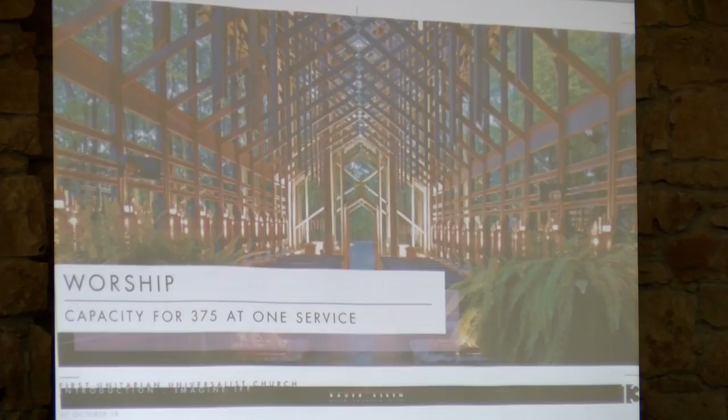And imagine if we had a worship space that was equally enthralling an atmosphere as what we're sitting in today. Imagine if we had a worship space that could have the capacity for 375 people at one service. Imagine if we had a worship space that met all the current energy and lighting technology qualities about that space. Imagine if we had a worship space that had the proper accessory spaces, narthex and that sort of thing. Imagine if we had a worship space that was fully accessible.

And then imagine if we had a campus that was a park-like setting. You have all the ingredients of that here on this property. Imagine if we had a campus where we had proper auto and pedestrian ways, so that there's not a lot of crisscross, and so that you don't open your car door and bang into the next car because of the slope of the parking lot.

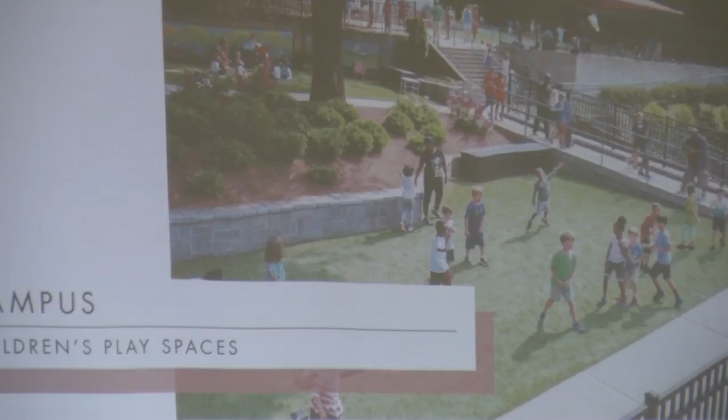Imagine if we had a campus with proper children's play spaces. And then imagine if we had a campus that had workforce housing incorporated into it, not only as a part of your ministry, expanding your ministry, but also as an income producer.

So what we've done is when we imagine all of those things, we try to evaluate what you have existing and then what the potential is in the future.

We work with a lot of churches, and finding the ideal site is usually the big stumbling block. So you all already have that, we believe.

And then you have 3 existing buildings on the property. The property is approximately 3.3 acres, and it's zoned R40 and R20, and that doesn't really affect the church because there aren't zones for churches, right? So churches are considered kind of an accessory use in a community. So really churches can be placed anywhere. They're kind of an exception to the zone.

So the next thing we do is we look at what are your program needs? What do you have today, and what do you need in the future? So I'm going to enlarge this a little bit if I can.

What we've done is we've gone through and analyzed what your existing spaces are within the church, and we've divided it into four categories: gathering (which is social), worship, administration, and education. Those are the four key categories.

So as we look at gathering, sorry, I'm juggling the microphone and the iPad at the same time. So if we look at gathering, what we've included as part of the gathering is the social hall. That's the biggest aspect of the gathering.

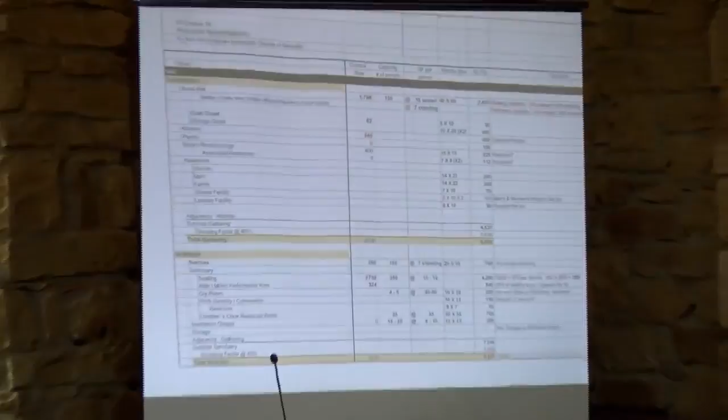But also, as you can see here, there are lots of different aspects of the social hall. You have the kitchen, pantry, and proper restrooms, that sort of thing. You have approximately 2,000 square feet that's devoted to that aspect of your ministry.

And what we're projecting is you need about 6,000 square feet for those things to properly function. That would allow a seating capacity of 133 people. Right now, you have an existing seating capacity of about 100.

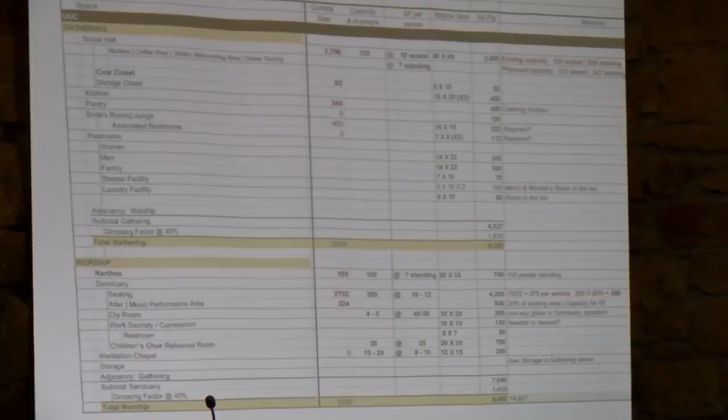So at 133 people seated, and standing in that same gathering space, the proposal would be about a 2,400 square foot space, so you could have about 342 people standing in a space like that. So it can serve various purposes, a properly sized gathering space or social hall for a 375 seat worship space.

That's the graph you see just below that. Your current worship space, the sanctuary, is about 2,700 square feet. We believe that based on needing to seat 375 people, you would need about 4,200 square feet for worship. So right now you have about 2,700 square feet, and we propose that you would need about 4,200 square feet for that.

Okay. This is going to help tremendously. Thank you. Thank you.

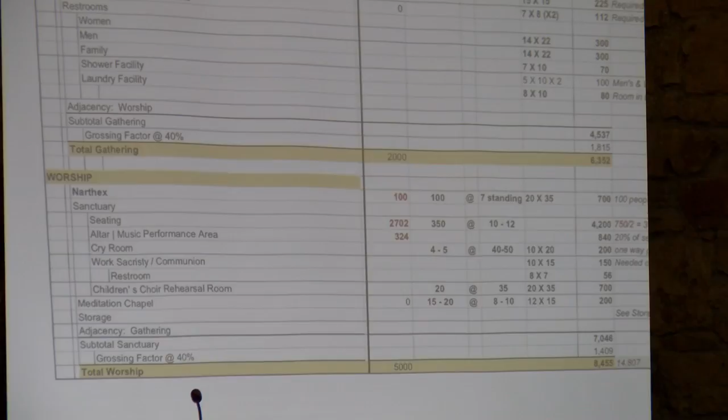As a part of the worship space in the program, we've included a narthex, so it would be separate. Right now, you kind of use your social space as your narthex. What we're proposing is, in a perfect world, you'd have a separate narthex for the worship space, which is an entry space before you go into a worship space.

In addition, you'd have the proper size altar for music and performance, a cry room, the work sacristy, perhaps a meditation chapel, and obviously storage. So all of those are elements of a worship space.

Right now, you have about 5,000 square feet. We're projecting that you need to seat 375 in the worship space, and we're projecting that you need about 8,400 square feet for that.

For administration space, you actually have a little bit more square footage today, but obviously the house used for administration isn't designed for that. So we have a lot of spaces that are probably larger than they need to be, and a lot that are kind of unusable for administrative space.

So what we propose is we've looked at all of the office needs for what you have currently and for your future, and we propose that you need about 3,300 square feet of space for administrative needs.

So imagine if you had all the things we talked about earlier: properly sized offices, conference rooms, work rooms—that's about the square footage you would need. All these things combine into what architects call a program of spaces.

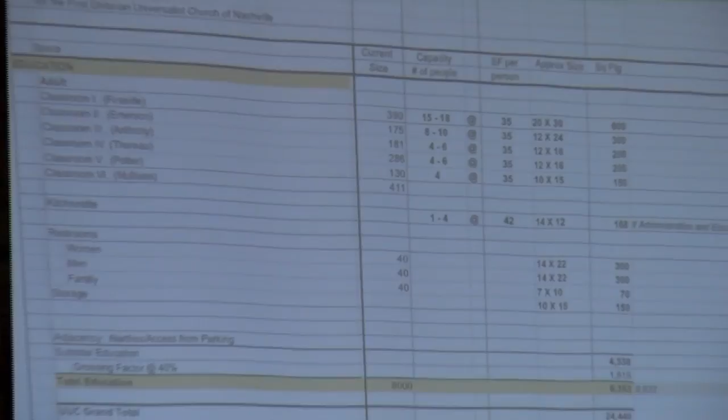So that's the four categories that we looked at, and then we looked at the possibility of workforce housing on the campus and what that might entail.

There's been some conversation prior to us, so we've taken that information and determined that if we had 1,200 square foot townhouse-type facilities, what would it be like to have 12 on our campus—12 townhouses considered workforce housing. That's about 14,400 square feet total.

So if we combine that information—your program needs—with the information we know about your site, and combine that with parking...

Parking is everything. I heard a presentation by the CEO of the Nashville airport, and he said everybody thinks we fly planes. It's not about planes, it's about parking.

And so they're in the parking business, not the plane business. Well, churches are very similar—you've got to have the parking in order to get people here, in order to have the proper number of spaces so that you can fill a worship space.

The R40 is on the Woodmont side, and the R20 is on the back side, on the top side. The setback, I've forgotten the exact numbers, but I believe they're about 30 or 45 feet on the 2 streets and the Woodmont side.

Part of it is because you don't really have a backyard. You have 3 front yards, 3 streets, and that's part of the reason why that setback goes that deep. So this diagram, just a quick diagram, shows you - you can't tell that at all, can't tell anything from that.

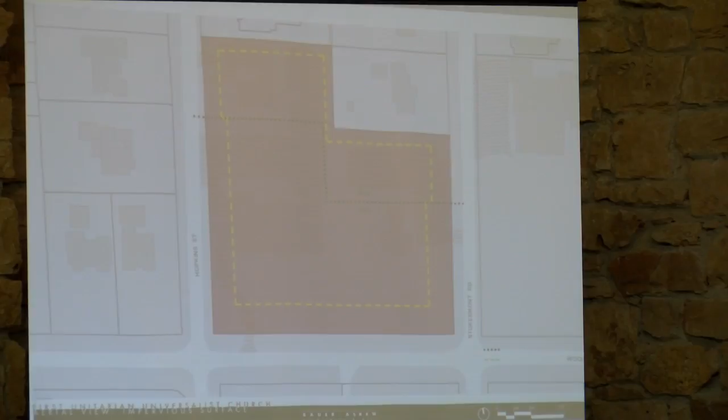But there's some delineation there that basically shows you where the impervious surfaces are - in other words, where water doesn't go through. So it's roofs and parking, and that's what this diagram was showing. And then this diagram was showing vegetation on the site, where the major tree areas of the site are.

This is what we work with most importantly, and that is what architects call a survey. So this is a topographic survey, and it's showing us a lot. You can't tell that from this information, but I'm going to walk you through a site analysis that we've done and tell you what this tells us.

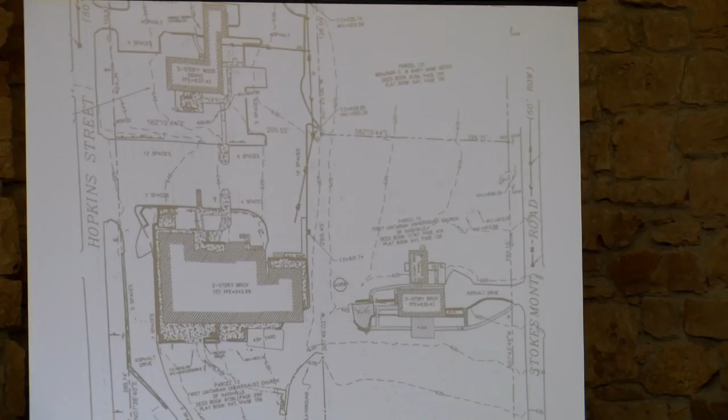Basically, it's siting where the worship space is - it's to the left, where the administrative offices are, and then at the top is the education classrooms. So this is like a site plan showing that, and it shows you your property boundaries and how we're bounded by Hopkins, Stokesmont, and Woodmont.

So what we do when we look at that is say, okay, what does all those lines mean? And what our analysis shows is that one of the more striking things about the property is we have a stream that runs through it, and the city has a right-of-way on either side of that. So there's a stream that runs through, and at the back corner, in the top right corner...

It kind of goes to what we call a head wall there, and it disappears underneath the parking lot. I don't know how we got away with that, but it does. So we're assuming that if it does today, we can do that in the future. But likely the city is going to be more concerned about that drainage area today than they would have been 10 or 20 years ago, right?

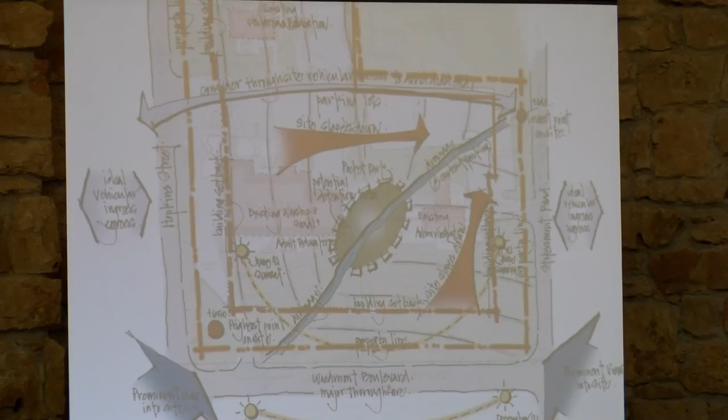So anyway, but what does that mean? That means we have to have what architects call detention. So when you have buildings on a site, you've all seen the large depressions where they collect water in case of a storm, and then release it slowly. They also filter the water that way before it goes into the drainage system.

That's what would occur in this stream area, or in the area in the center of the space, labeled Pocket Park. That could all kind of occur in that zone.

So what's very interesting about your property is the numbers I have on the bottom corner that says 650. There's another number on the top right corner that says 610. There's 40 feet of drop in your property from one corner to the next.

Well, that's a challenge for anyone, and it's the biggest challenge for parking, because you want parking to be on level, right? And right now, you guys have masterfully put parking on whatever slope of surface possible, and thus it really doesn't meet any kind of code and isn't accessible. It works to park in, but that's about it. So when you open your car door, it hits the next car, that sort of thing.

So typically you want 5% slope on a parking lot, and then 2% slope for accessibility, for handicap accessibility. So what's interesting is along that line, that diagonal where the stream is, all of what architects call the grade lines run vertically.

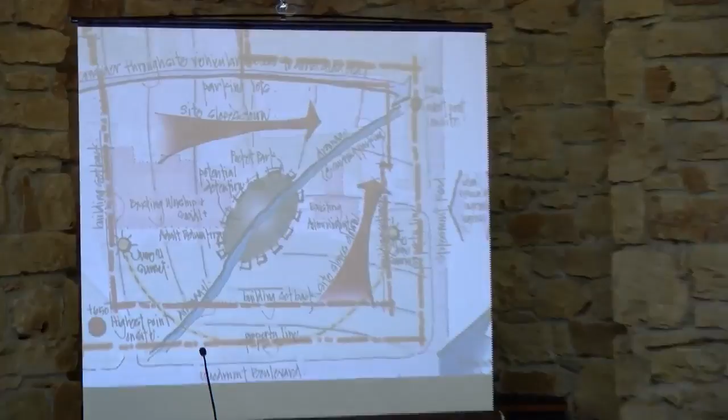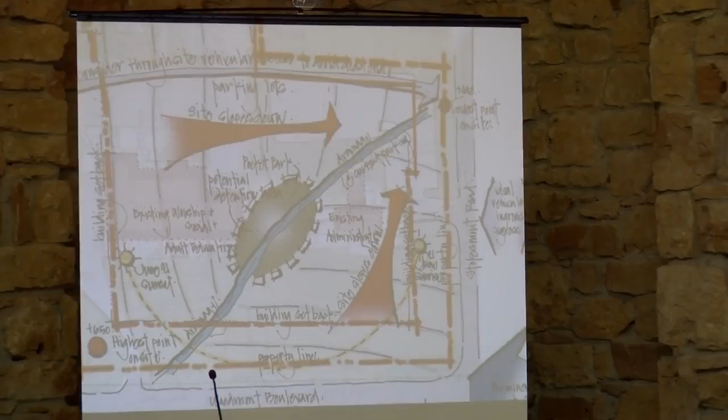Those are the grade lines you're seeing there. Each vertical line indicates a 5-foot drop, and on the other side of the stream, all the grade lines run horizontally. So what does that tell us? I'll show you in a moment, but it's a fascinatingly challenging site for that reason.

We also look at sun angles. Your southern sun is coming in here, giving you lots of natural light, and your northern light comes in this way, depending on how you're facing. This shows the December 21st sunrise and June 21st sunrise, and how the sun moves across the horizon and across the sky from east to west.

We also look at where the views are from the site, really from the two corners: the intersection of Hopkins and Woodmont, and the intersection of Stokesmont and Woodmont. Those seem to be the most prominent view sheds into the site, and we think viewing of a church is important—you want to see activity, you want to see that things are going on there. So those view sheds into the site are very important, as well as view sheds out of the site, into a park-like space.

The ideal egress and ingress for automobiles is really from the side streets, and that's pretty much what you have, with the exception of one location at the bottom right-hand corner where you have access directly onto Woodmont. But for the most part, you have existing access from the side streets.

So that's the basics of the site analysis, and obviously we have to work with the building setback. We know that as we analyze the property, we can't put a building beyond those setback lines. What we try to do with all of our work is make sure we follow all the rules—they've set up all these zoning rules and code rules, and really those are all for our safety and for a zoning that's been established for years.

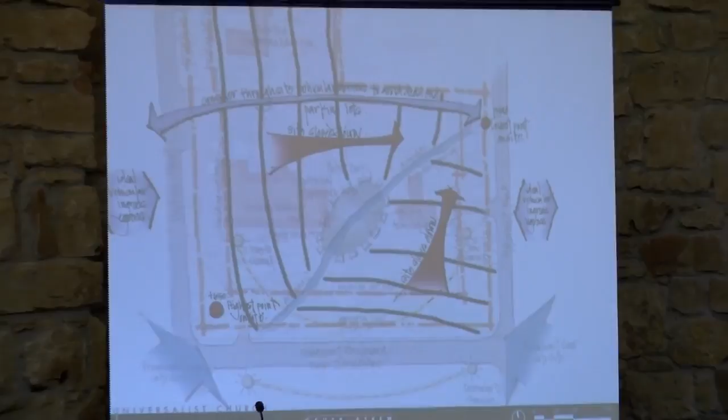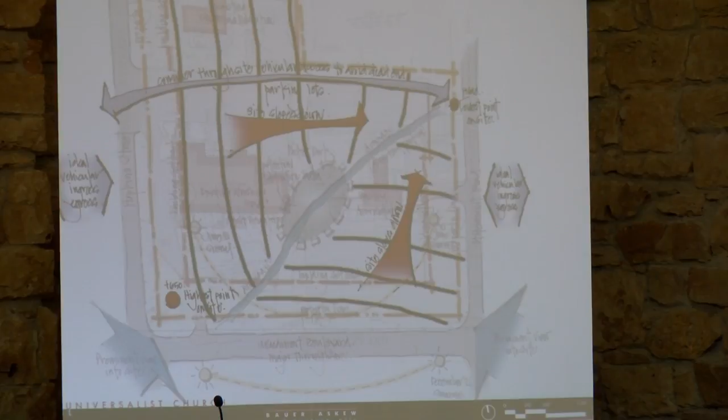This is more of a detail of that map, emphasizing those vertical and horizontal grades, because that's where the slope is. Everyone's familiar with Nashville—there are ranch houses built on the side of a hill, and when they're built, they're not built against the grade, not perpendicular to it, but they follow the grade. There's a reason for that: it's the easiest way to build.

But if you can imagine a ranch house built like that, sometimes on the main level, the back of the house is underground because it's sitting into the side of the hill. And then the front of the house might be open so you can access the outside, or vice versa. So that's what happens when you build on a horizontal.

When you park, you want to park on the grade, you want to follow it. So the ideal parking on this site—and it's all about parking, right—is when the parking is parallel to those lines. It's interesting that we've got that little stream dividing that, and we're trying to work with your natural grade. The reason we have to work with your natural grade is because you're bounded by 3 streets, and those grades on the streets aren't going to change. So we have to connect to those, and that's why it's so important.

So when we look at this analysis, we ask what are our options. The first thing we do is take that program I was talking about before, and we create little boxes, for lack of a better word, for each one of those elements we've talked about: social, the gathering space, worship, education, administration, and the workforce housing. So those are approximate footprints of those things—if you had them all on one level, that would be the footprint of those elements.

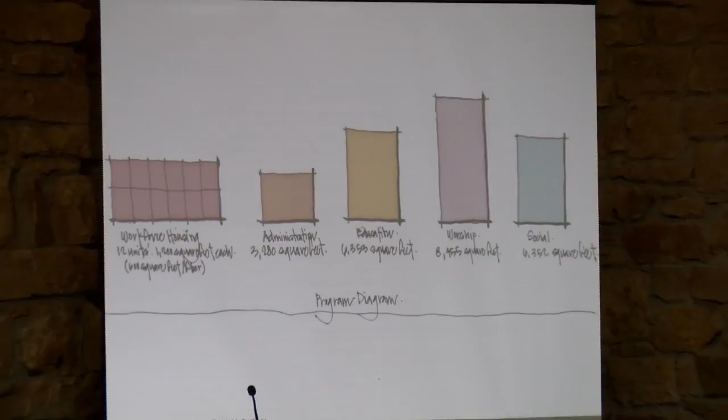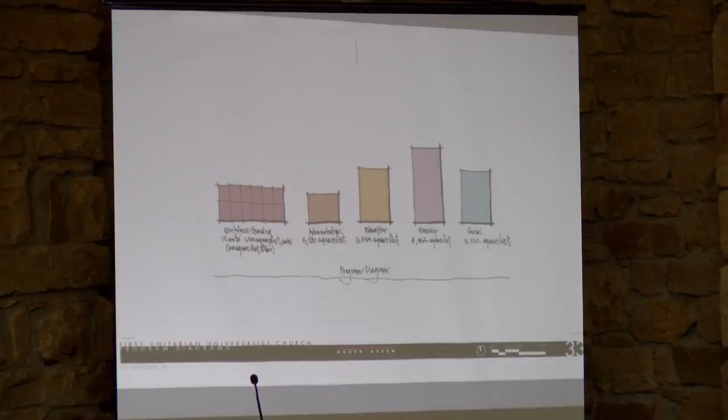Now, what I'm going to show you in these diagrams is these elements all stacked. You're going to see one, and I'll walk you through that. One of the beauties of your site, because it has a slope, is that we can do multi-level things on the site also. So that gives you a sense of it. Here we go—this is the first layout diagram I'm going to show you. In this one, we've taken your existing worship space, and I have a pointer somewhere—I'm going to grab that.

It is not in there. Okay, your existing worship space is, I'm going to step up here. Your existing worship space is right here. This is worship and social hall. So I'm standing right here, okay? So that's your existing space.

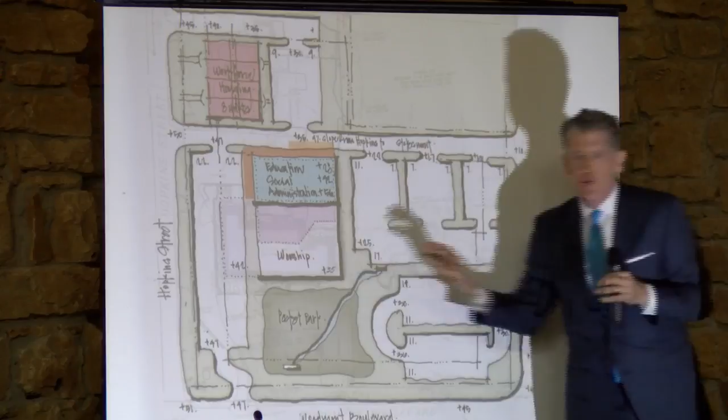So what this diagram says, and kind of vets a previous idea, is what if we just expand where we are? Can we do that? That's what this diagram shows. If you remember in the program, we said we had about 2,700 square feet. We need about 4,000, something like that. So this part right here would be new, expanded out this back wall. This is just a diagram, the details of it we have no idea of at this point. But if we needed the size space that you need, you would need that much space just for worship.

What's interesting about this space is that we enter on the survey, and it says that we're at 42. But there are two or three level changes between where we enter at the social hall and here, so we're really standing at 35. That means there's 7 feet of difference between where we come in and where we've dropped down. So that's what these numbers are indicating.

That's your existing social hall area there, and then this is the worship space. We're saying, well, if we wanted to add on to what you have here, what's one way you could do that? We're proposing that you add to the back in this diagram, and then we stack the education and social elements. Those two are almost exact same square footage and need, coincidentally, so we could stack those because, as you know, the property drops down quite a bit here.

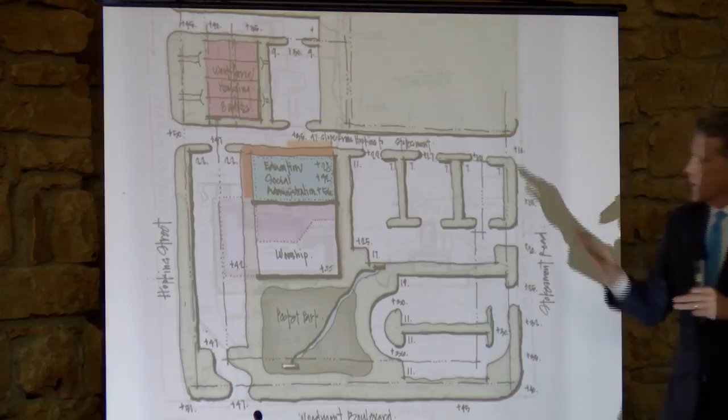One of the things shown in almost all of these diagrams is, as I was talking about parking and how important it is, that we have a connection from Stokesmont to Hopkins - a drive that interconnects those two streets. That drive is relatively steep, but no steeper than other streets in the neighborhood. If we connected there, we can follow those lines we talked about previously and get our parking all on relatively level areas. We'd terrace parking up to the worship space, and in this diagram it's showing a full tray of parking on the west side.

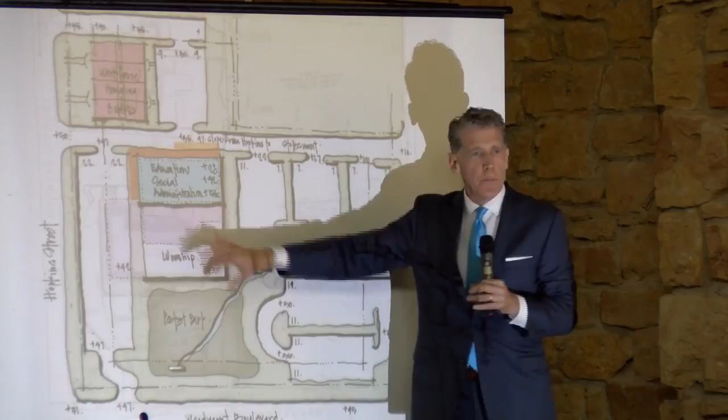If we tried to incorporate all of our needs in this zone, we could have worship as it is today with an addition. We could have education on a floor below, social on the level that you enter on, and administration on a third level. So that's an option for adding on to this space within your existing footprint.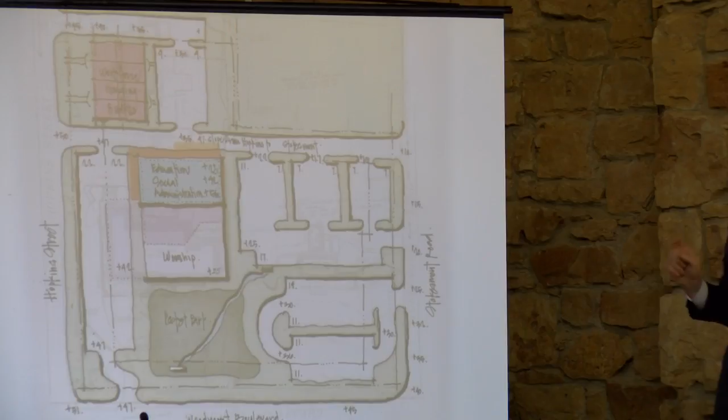We are showing in this diagram removing a portion of the building, the existing social hall, and we do that again because it's all about parking - so we can get a full tray of parking on this side. Remember our stream subdivides here, so the grades were running this way, meaning this parking would be running in trays this way - a tray of parking, 60 feet wide. We're showing space in between that we can mitigate the slope, stepping up the hill all along there.

In this diagram, we're also showing the potential for workforce housing in the top left-hand corner, showing 8 units just on that piece of property, with parking around that. So that's one option, and I'm going to show you four others - that's one option on the possibilities of the existing site.

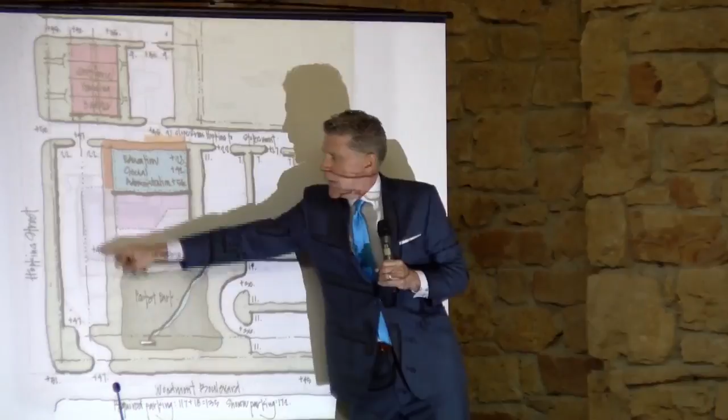Can you do an addition here and leave that? Yes. Some of the pros and cons are what you probably experienced today. The parking lot up here is higher than our floor level, which isn't the best situation for drainage and similar issues, and in terms of an entry sequence into the space, it's not ideal.

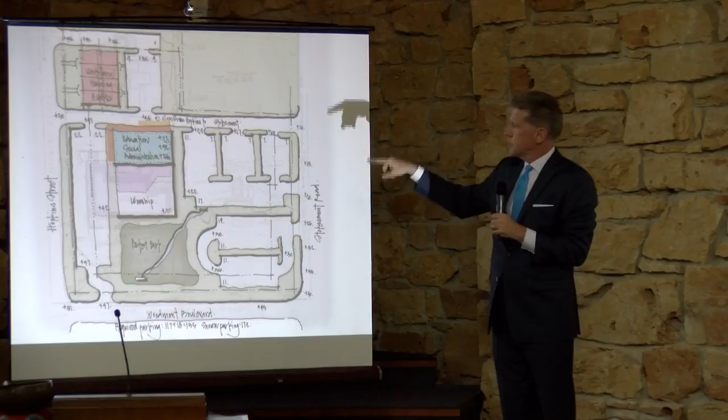But can that be mitigated? Yes, there are options within this space. This is showing the most parking you'll see in any of the diagrams, showing about 172 spaces.

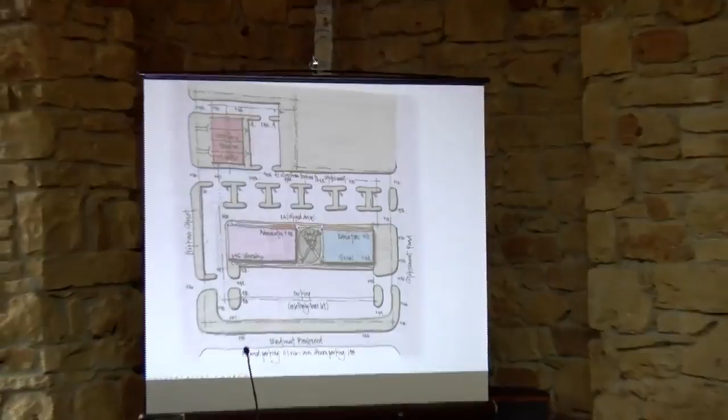In this next diagram, we won't dwell on it much because I don't think it's an option you should consider, but we're showing it anyway. This isn't dissimilar to the other, where we could use your existing footprint or build new, with worship space on the left and education and social stacked in a two-story building. Parking along the front would mean everything from where we are today to the street would be paved. We don't recommend that, but it shows what typically would be done if you wanted to maximize parking. You can see in the back, even with the cross drive, doing all that work for the minimum number of spaces just doesn't work, and it limits the park-like feel of the campus. We probably wouldn't recommend pursuing that, but thought it would be interesting to examine.

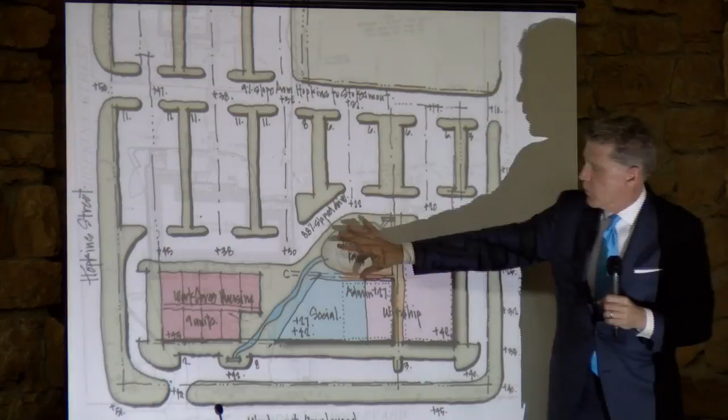Now this diagram shows something quite different from what you have today. This is basically building to Woodmont to the building setback line. There are positives to that, since building to the setback line lets us maximize parking back behind. As you can see, these parking trays step up the hill on that side of the stream. We could potentially have our worship space on this corner with education possibly below, and social and administration in this zone. Our park would be more of a pocket park in back, and workforce housing could be on this corner. All of that would work with your existing grades.

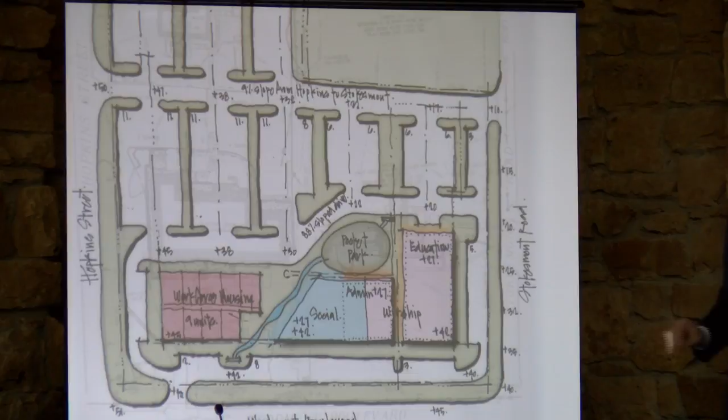We could have parking access all the way around the perimeter, which we envisioned as very minimal in terms of impact on the appearance of the building and its setting, but your park really moves to the back of the property instead of looking across the park-like setting you have today. This is showing 9 units of workforce housing, with all the programmed areas shown: worship, social, and administration down below, and education down below worship. The beauty of locating a building this way is that we can take advantage of the hill.

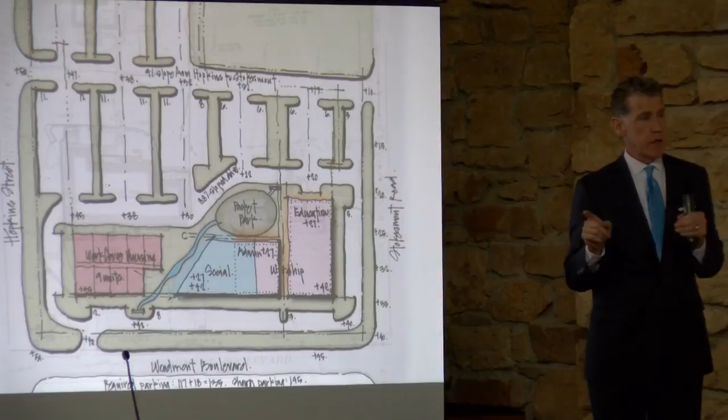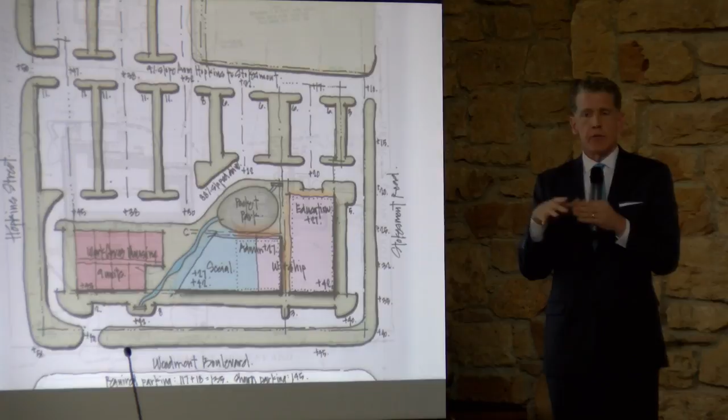If you stretch a building with the grade, one side of that building is likely underground. So if you stretch it out against the grade, you get access to natural light all the way around, and views all the way around where it projects out of the ground. If the hill is going down and we're projecting out, each level can have views and natural light. That's an important element in the design.

So that is option 3. In this option, different from the first two, we're looking at the back left-hand corner of the property converting to all parking, totaling 45 spaces in that back corner, and 145 on the entire site.

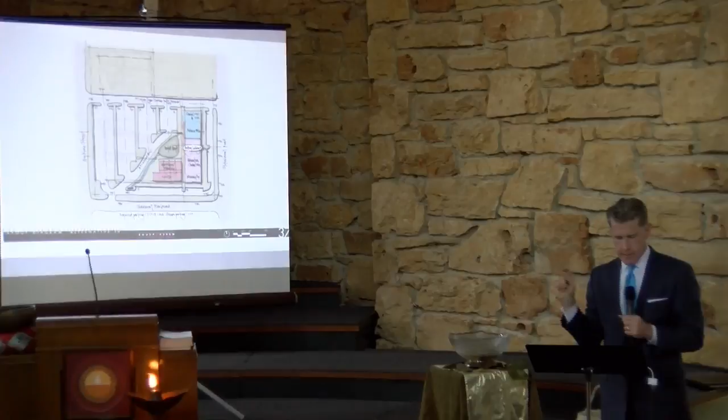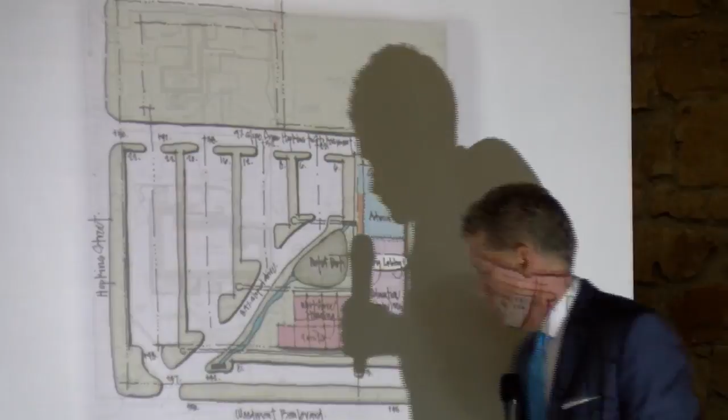On this one, we thought we'd mix it up and ask: what happens if we sell that property to gain some income, and then invest the results of that sale into our property here? This first diagram is similar to the first one, showing a full tray of parking running the full length of that street, with trays of parking stepping and following the stream, connected by a drive.

So this is showing what if we take this side of the property, basically the Stokesmont Road corner, the Stokesmont and Woodmont intersection. What if we take that and build there? Now that could be all one building, or it can be multiple buildings. We have the ability, just like we had shown previously, but it stretches out further.

We have the ability to be multi-level. It could be 2 stories, I think we might even be able to get a third floor in that design. So in other words, at this end of the property, because our hill drops, we'd possibly be able to get a 3-story building in this zone, 2-story in this zone, and then a single story in this zone.

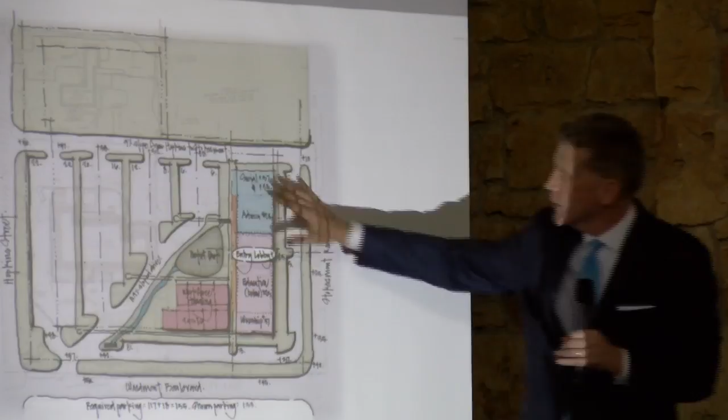So we were showing all the elements. What's interesting is that on this diagram, all of the elements in our program fit along that edge of property, right? And in this diagram, we're showing that the workforce housing might be in this zone. Again, this is showing 9 units of workforce housing. That could expand a little bit into this green space.

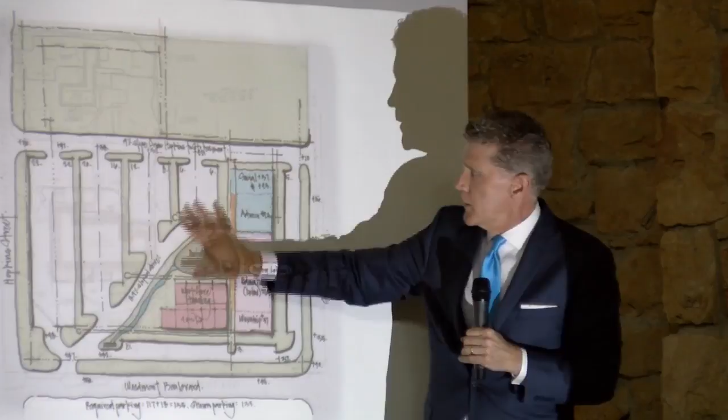But then we're showing the green space, the park, and then the parking. In these diagrams, when we park up here at the highest level, we're able to come in on grade right here, so we never change grade. If you park in here at the middle level, you can enter into the center. If you park here at the lower level, you enter on the lower part of the property. So if we park in this zone right here, we can walk in on level, right?

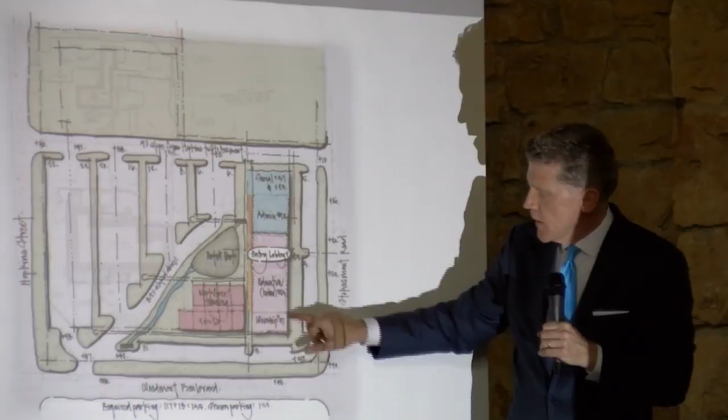So anyway, the idea is that we can come from these parking zones into the building at various levels, right?

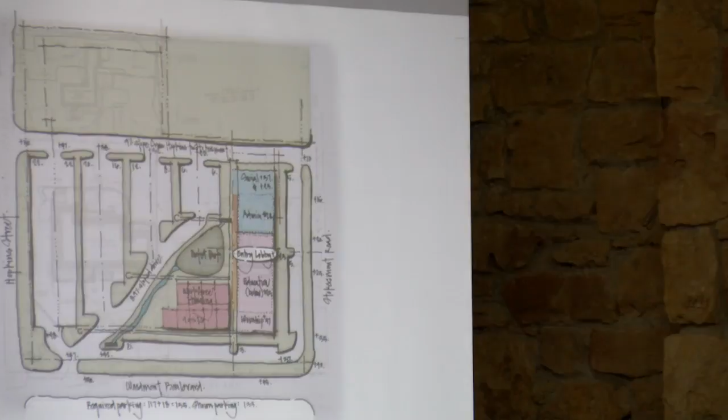Where is worship on that one? Worship would be on this corner. Yes, worship would be on that corner. So worship could be on this corner, right here. Okay, so the worship space is about that amount of space, and then we'd have some social elements on that same level, right?

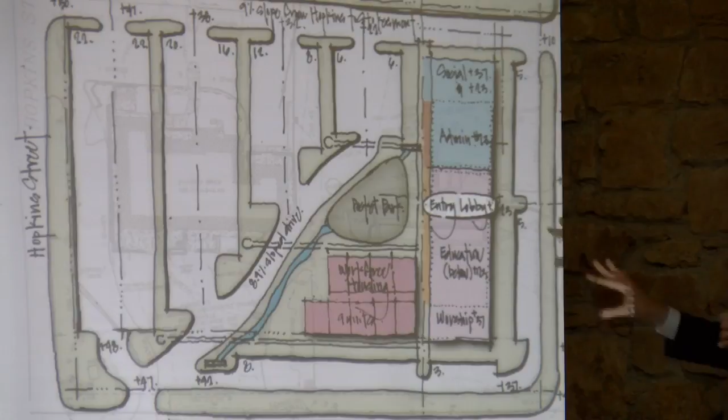And then down below that, we could have another level - so the social doesn't quite fit all in that footprint, so we'd have some of the social elements, and there were a number of different elements that could be on another floor, so that might drop down to the second floor. We could have administration and education all in that bank. I'm going to show you a 3-dimensional diagram in a moment. But anyway, one of the thoughts was, when we were working with the committee, is there a way to do that and then get workforce housing on this corner?

So let me show you this diagram, and I think this has potential to be quite nice. In this case, you'd be selling that lot, and I think it's probably a quarter of an acre, around that.

Okay, so in this diagram, what we're showing is workforce housing over to the left-hand corner. So again, it's in front of where this space is now, more toward the street, showing workforce housing, and then we let that - the worship and social, education and administrative space - kind of frame this pocket park.

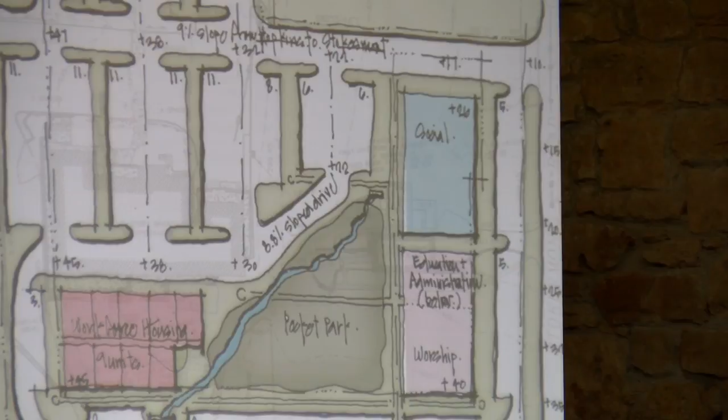Okay, so we have the park that's in the middle, not dissimilar to kind of the park-like setting that you have today, and then we've tucked the parking back behind. So we have the parking all back behind, and in this instance, we're showing parking in that lot.

And again, these are all interchangeable, these ideas. But basically, what these ideas are showing you is the potential - none of which are the solution, or none of which is the thing that you should do - but basically what the potential is of your site, and showing that, wow, it has a lot of potential, is what we believe.

And just its location, even though it has its challenges because of the hillside site, if you're looking for a site somewhere else, you're going to have those types of challenges. Some challenges we get into on another property now, we're having to bring sewer to it. You guys don't have that issue. We're having to bring sewer, which was a major expense. And then we had to get this property rezoned and annexed into the city. It wasn't a church. You don't have those expenses. So that's the beauty of having a site that's so centrally located and has potential.

Has potential within the existing confines, and has potential beyond that also. So that's what this diagram is illustrating. This little section kind of shows you if we had worship space on the corner of Woodmont and Stokesmont, which would not be dissimilar to those images that we showed you. We think we can recreate what you have here, and this is an awesome sacred space. We think we can recreate that on the corner. It could still face east, just like this space does. So that's what that would be at that level. Then you could have an entry that's kind of in the middle, between these buildings, where you might enter on the middle level and go up an elevator to the worship space.

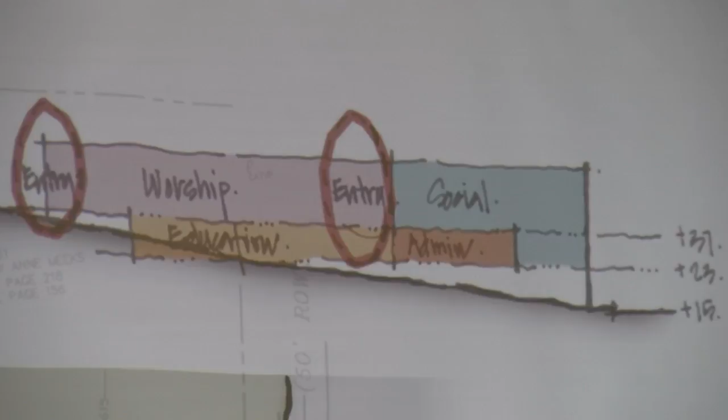You'd enter flat from the parking, go up an elevator, and that's where the entry is shown. You could have worship to the left of this entry, and social to the right. You'd enter on the level of education, so your parking would be level with the education administration space. That's just one diagram of how that space could lay out. Before we get to this corner down here shown in the diagram, we even have a little bit more space. We believe with a little more study we might even be able to get three levels there, which can again consolidate your footprint, and then allow these to be individual buildings or the same building. All of that would be involved in how you'd ever want to phase such a thing, which would dictate whether it was a singular building, multiple buildings, or if you phase it, additions to a singular building.

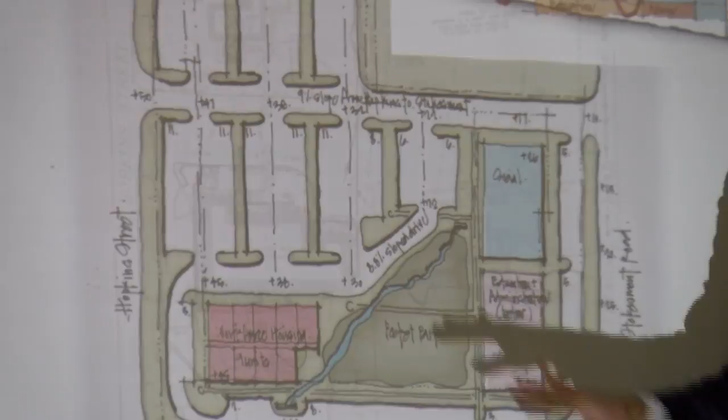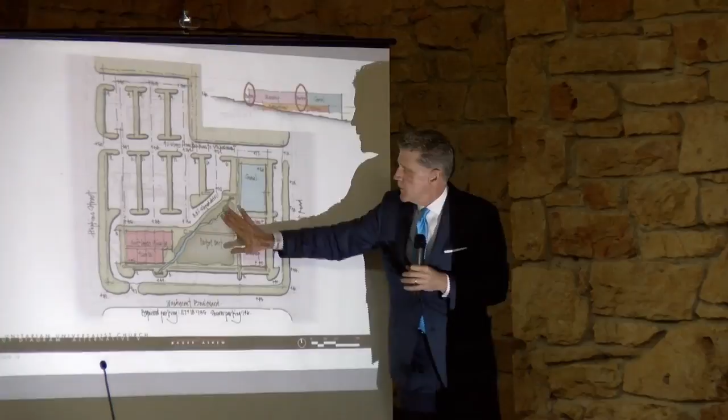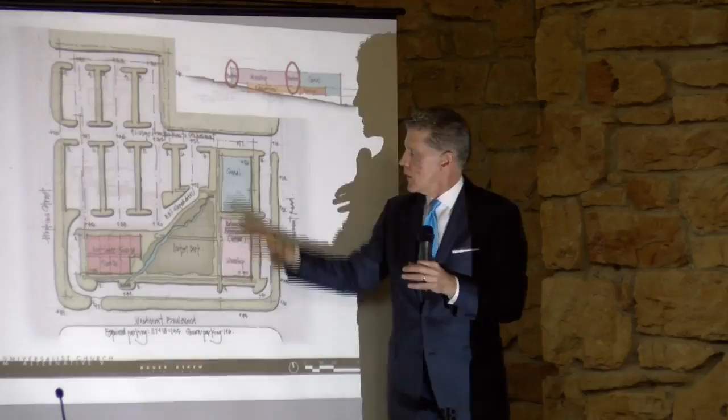So in all of these diagrams, this one is showing 146 parking spaces, so we're gaining on what you have today. It's showing the 9 workforce housing units, and this diagram, more than any of them, maintains that stream, which will be very important to the city. We envision this pocket park might be in an area that could be retention, which is when you actually retain the water and it can become a water feature on your site. Or it could be detention, where it just delays the water from going out, similar to things you see designed around town. That could all be incorporated into the pocket park, which you could crisscross with sidewalks, with a playground incorporated near the education space. This diagram concentrates all those elements - the park, the buildings, and the parking.

So those are the five different diagrams, five different ways, and some of them are obviously variations on a theme, but basically meant to express that we can work with your existing site to get parking that works. This is fully accessible, and you have minimal car door banging, that sort of thing.

Garages are an option, but they're very, very expensive. We used to use a number of $10,000 per space for how much a parking garage costs. Now it's like $15,000 per space - it's just amazing how expensive they are. That's why we tend to shy away from parking garages, especially if we don't have to. In an urban space, on a tighter site, you would definitely want to consider that.

Not that we wouldn't want to consider, but that's the rule of thumb number that we use for parking in a garage. Yes, sir. What happens to the columbarium in all these options?

With any of these options, we can move the columbarium. If we're working within where it is, we would relocate it and give it a prominent space in the new design, wherever that would be, and that's very doable. Could it be within the pocket park? Most definitely, and that's what our assumption would be, is that it would be there.

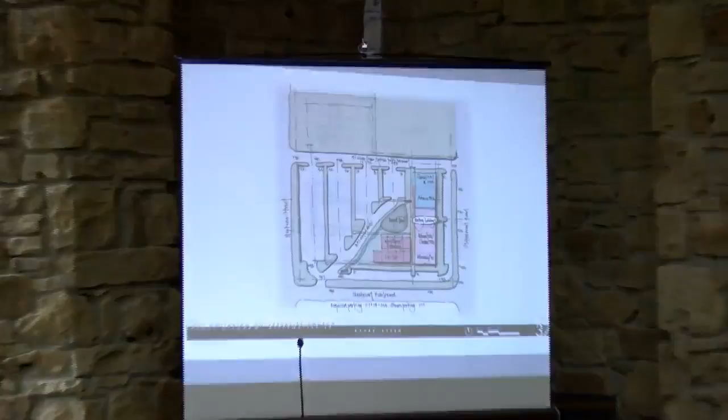That's this diagram. And as I said previously, that could happen with almost any diagram, so we just depicted it in this one. But that still shows the idea of the connecting drive, and then parking off of that.

The parking itself, where you're showing the dividers, would that have trees? I know that's probably optional for the church, but I would like to know about that.

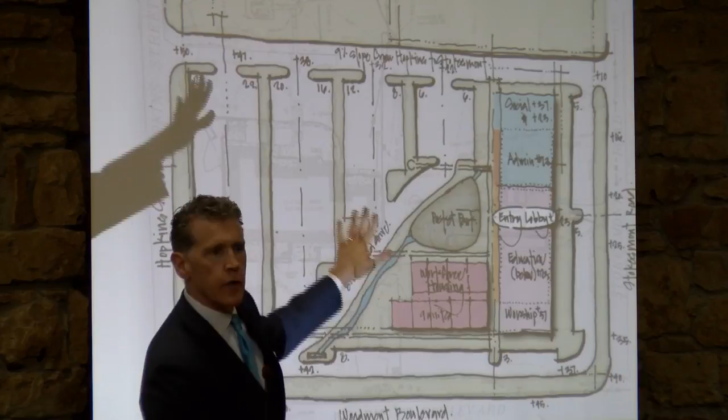Yeah, we would envision that those all have slopes, because that's where we're terracing, what architects would call terracing down the hill. So that would have slopes, and yes, we would envision that would be trees and planted.

So it really becomes, the idea would be that we're identifying this space as a pocket park, but the idea is that it's going to look less like a parking lot and less like just paving everywhere. That's the beauty of having to step down the hill, because you're kind of required to have those green spaces in between to terrace it down, so you have green space incorporated into the parking area.

Thank you. And one other point, I don't know if you were informed, but you might want to know that there are certain trees on the property that were given in memoriam, and they're named for people. You might not be able to move the tree, but I don't want you to get blindsided by that, and you should know that maybe other trees should be replanted and labeled correctly.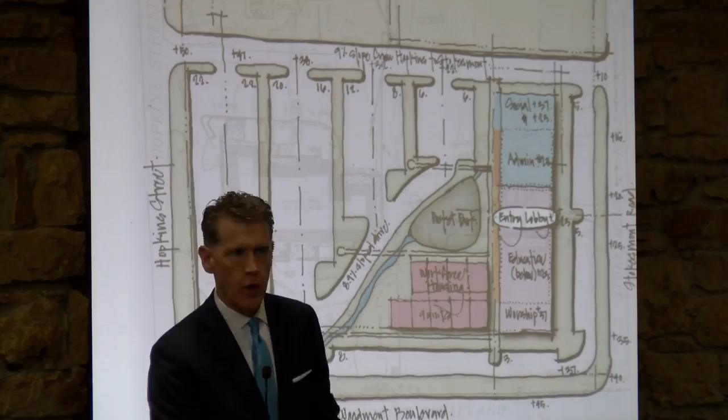Right. Yeah, it'd be great to ultimately know which ones those trees are, see if those could be salvaged, or if we have to replace them, then make sure that memorial goes to a new tree.

So if there's a desire, what we found is that some companies, mainly companies, still need to have that plaque on the wall that says we're LEED Platinum or LEED Gold. Schools are another entity that need to have that. So if there's a need to have that, then we go through the paperwork to obtain it. But most every building we design now is LEED Silver, which is the second layer, just below gold.

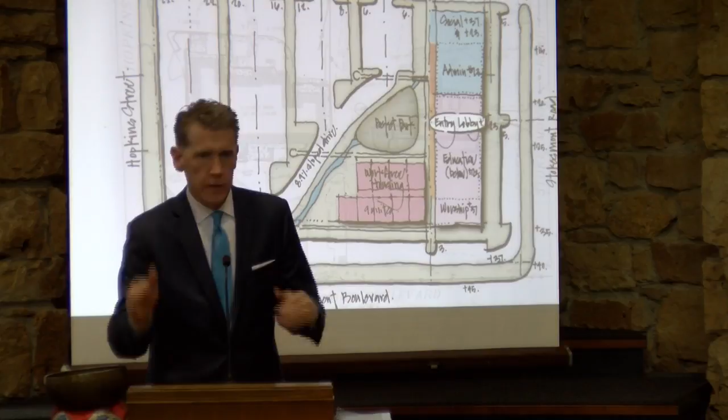Code kind of requires you to design buildings to the LEED Silver, LEED Gold range, so we would be doing that whether you got certification or not. The certification is costly and a lot of paperwork, but it does let you say you've got a LEED certified building. What we always do with our designs, because of green energy and the environment, it's kind of a natural thing we do. So we always say it's built with LEED principles in mind, but might not necessarily have to apply for it.

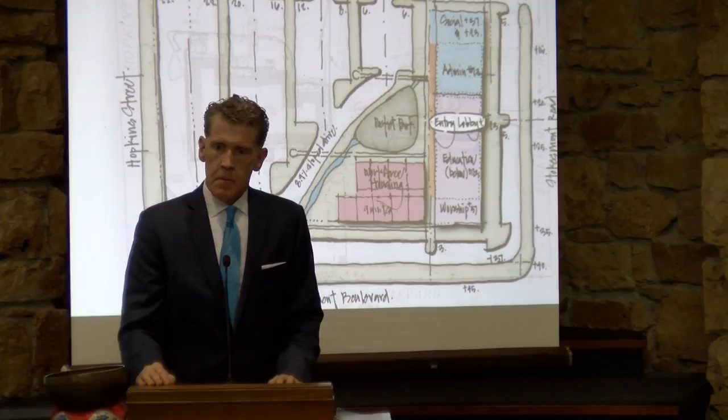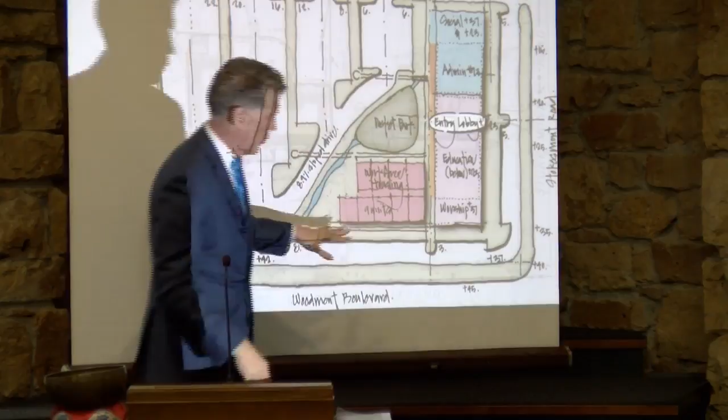The road that runs around the edge, is that parallel parking along there for drop off? Yes, that's what we had envisioned. That has very little impact on the front elevation, but it does allow you to get access to every level, and it's an option. What we're illustrating here is that it could be a 1 or 2 lane drive with parallel parking around the edge, just to easily access for handicap accessibility and that sort of thing, and to easily access the building since parking is somewhat remote. But again, at each level we'd be entering on the level of the church, so you could basically walk flat into the building at any point. That's the concept anyway.

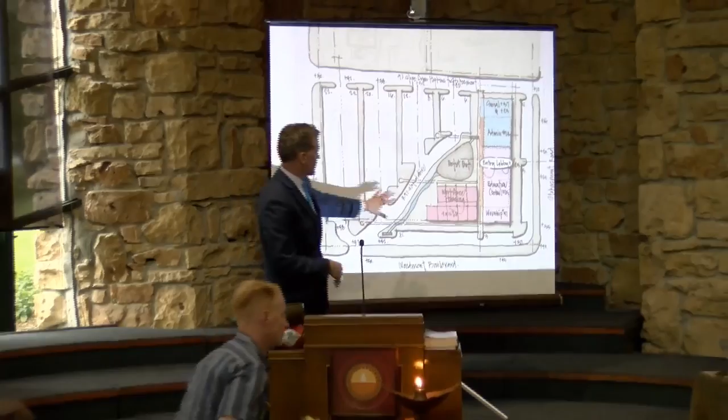Assuming we had housing of some kind on the property, how many parking spaces are you assuming? So in this one where we have 9 units, we would have to have 18 parking spaces. Where would they go, for example? We haven't kind of identified what would be the workforce housing parking on these diagrams, but it kind of makes sense that they might be in this zone or this zone, something like that, and those would probably be just kind of identified.

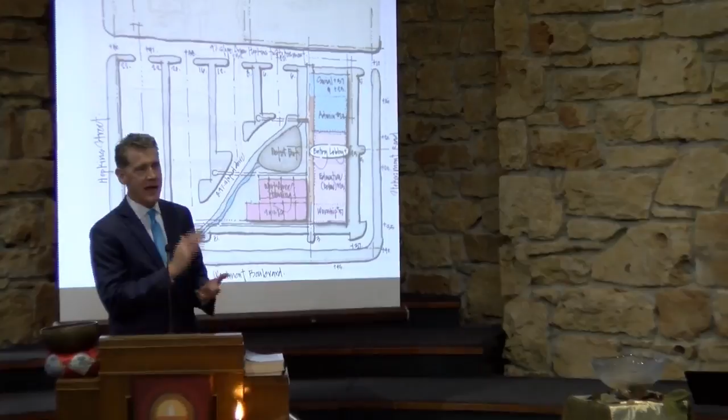Yes, but those are counted into those numbers. Because of the terracing you referred to for that parking lot, is it possible you can use some type of semi-permeable surface rather than just asphalt? Yes, and in fact the terracing area we would envision is permeable, so that would be landscape, ground cover or something like that, something low maintenance but that would be there forever. Our low maintenance ground cover of choice is crown vetch, because you cannot do anything to kill that stuff, and it can look beautiful, much like a lawn. You cut it once a year and it holds a slope.

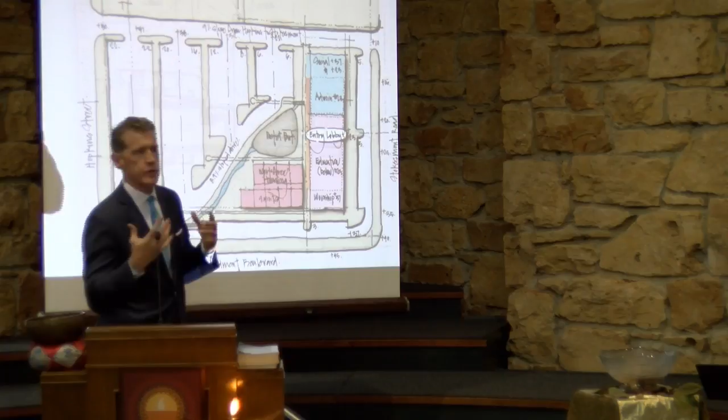So there are lots of different plant material that could be on the slope part. Then on the parking part, that can also be permeable. We've had various success with permeable concrete, which tends to get clogged up, so typically you use permeable pavers, which is a little more costly. So that's what you get into, the balance of cost versus practicality in the permeable paving. But yes, the slope areas we envision would be green spaces, and they would be fully permeable.

Our question is, it seems like there's a lot of pavement there and it's all going down toward the building. What impact does that have on drainage? And my second question is, does it have to be paved? Are there any options besides asphalt for parking, and what impact does that have on the cost?

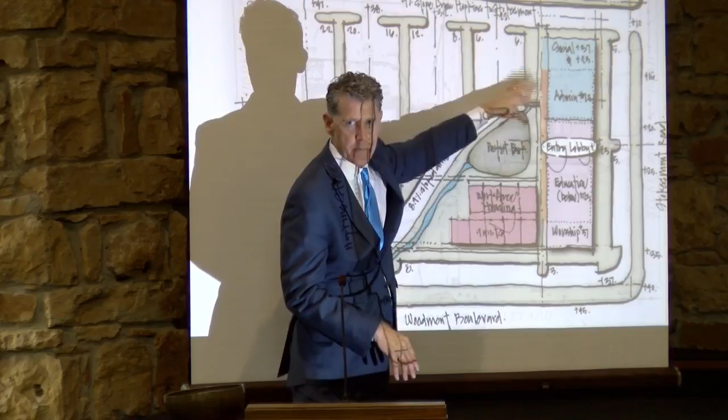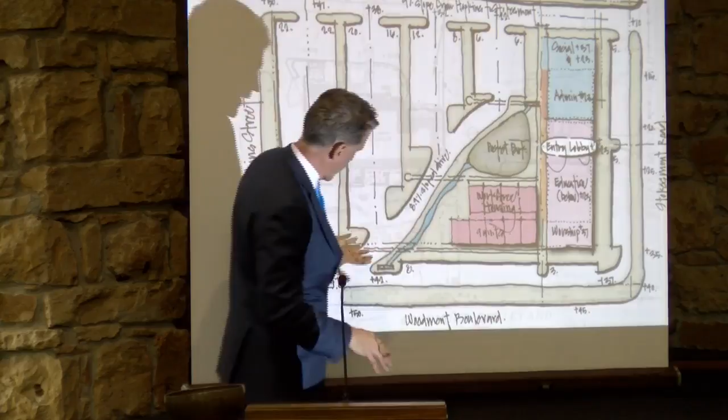So what this diagram is depicting is that these lots are level, but they do terrace down, and in this case they're terracing down in this direction. Because of the stream and the park and everything and the way the site is, we envision that the water from this would be captured here and then dispersed. In terms of paving, again that's preconception, we would have to get much deeper into design to actually know that. But for example, this drive is sloping down also, from Woodmont down to here, about 20 feet from here to here. So we're thinking that most of the water here is coming down here, and it will have to be captured in drains, taken underground, and then released.

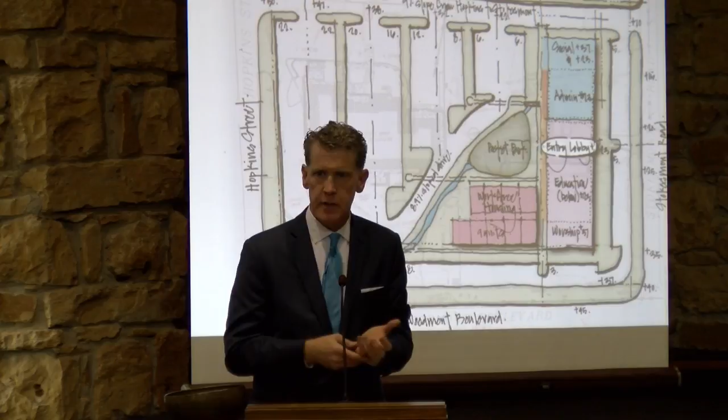In terms of paving, yes, there are a number of options for permeable paving. As I just mentioned, you can get permeable concrete, which you've probably seen more times than not. We use that in the parking spaces only and not in the drive aisles.

But that has a tendency over time to get clogged, so it doesn't have the lasting effect that other permeable surfaces will have. But it is the most cost effective. So then you do permeable brick pavers and that sort of thing. That's more expensive, but is more lasting in terms of its use.

But yes, there are different options that we can use for paving, and you can do that in just areas too. Like for example, you could do the permeable concrete in the parking tray, and then the drive aisles can be paved. We've done those combinations before.

Sir? And just looking a few steps ahead, is it possible to get each one of these diagram options presented with the cost and the implications for getting raising the money to meet that cost?

Most definitely. We haven't discussed costs with the committee yet, so we haven't gotten to that point. But what we would do is take the square footage of the building and apply a multiplier. The multiplier is slightly different for a worship space than for education space or social space, because of the level of finishes and everything. So we would have various multipliers for the square footage at this stage of the game.

And then we would also have a multiplier for the site work. It kind of depends on which project, but pretty much for each one it would likely be in the same range, because we're affecting the same parking and really the same space. My gut sense is if you renovate this space versus building new, it could be a wash, or it could actually be slightly more expensive to renovate.

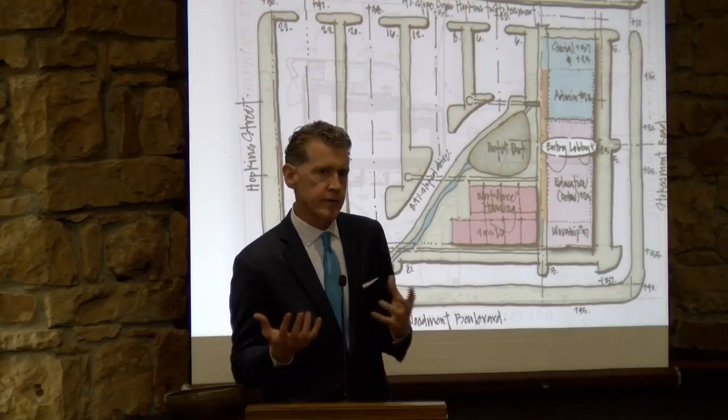So the costs in all the diagrams, because we're dealing with the same square footage, will probably all be about the same. How they're phased is probably another element. Can we show what the cost would be for just worship, and what the cost would be for just the social improvements? We can do that too. It's all about the square footage number and the cost or cost range we attach to it. But we can definitely do that.

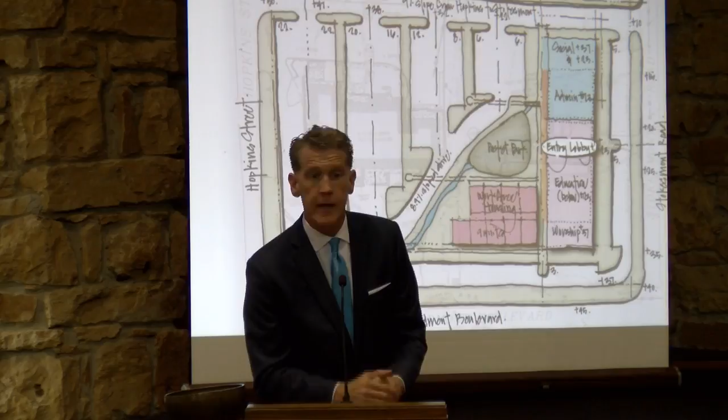I'm wondering how much there might be asbestos or something else that would be affecting renovation and or tear down cost. Right.

I am not certain whether there have been asbestos surveys or not. That is a whole lot easier to handle today than it used to be. So there is a cost associated, but usually, in our experience, it's not a big cost number in the whole scheme of a project. And it's just something that has to be done on the front end before you can begin any construction.

We run into it all the time with renovations, whether it's the glue on the underside of a tile that you're disturbing, or whatever. So asbestos seems to be able to hide in lots of little places you wouldn't think about. I don't know that there's been a survey of the existing properties, but it's something we can certainly handle.

This may be a question that Jake can answer, or somebody on the committee. What's the seating capacity that we have right now? I think it was right at 200.